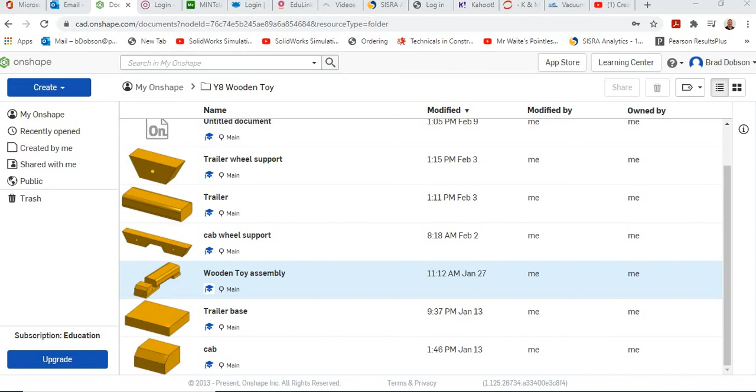Okay, in this video we're going to look at creating our cab base. So again, go to create, new document, call it cab base. It'll open up our drawing pane as usual.

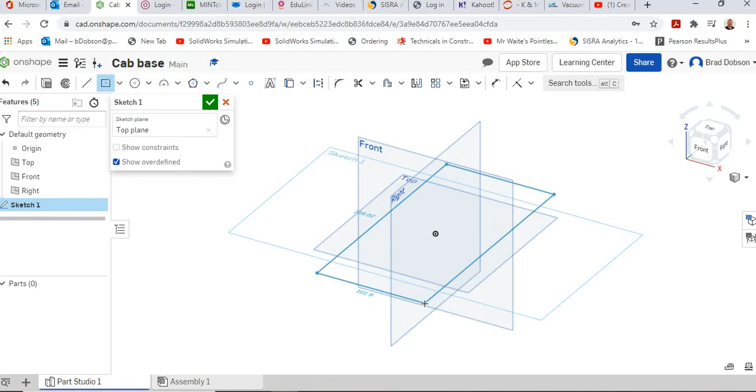Same sequence then, so we've got a sketch, we're going to select the top plane, left click, we're then going to select the center point rectangle. Hover over the origin, drag out a rectangle, again go to dimension, hover over that narrower edge, left click, drag out the dimension line, left click again and then type in 70mm.

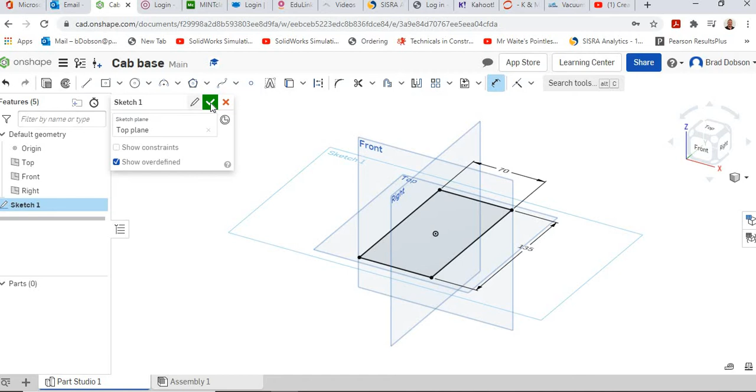We're then going to do the same, so left click, drag out, left click again, and it's 135mm, this longer edge. Once we're happy with that, we can then extrude it, so click on the little green tick, click extrude, and this time we want to select the sketch that we want to extrude, so it wants to be 15mm this time. So that's the basic shape done.

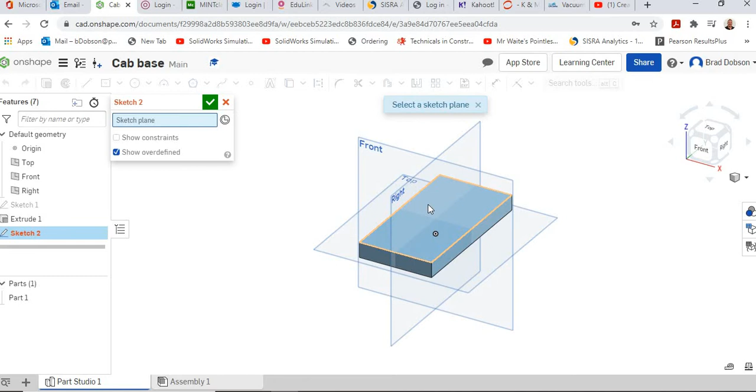Once we've done that, we're then going to position our holes on there. So again, I'm going to go to new sketch, and I'm going to select this top plane this time. And for this one, I'm actually going to convert it, so I'm going to click on this little icon here, so it's a plan view, right, looking straight down, find it a little bit easier to do the hole positioning.

So we're going to do center point circle. If yours isn't selected there, you just need to go down, but center point circle. And again, we're just going to hover over that sort of centre line there, and you can see you get this orange dotted line. And we want to come down a little bit from the top.

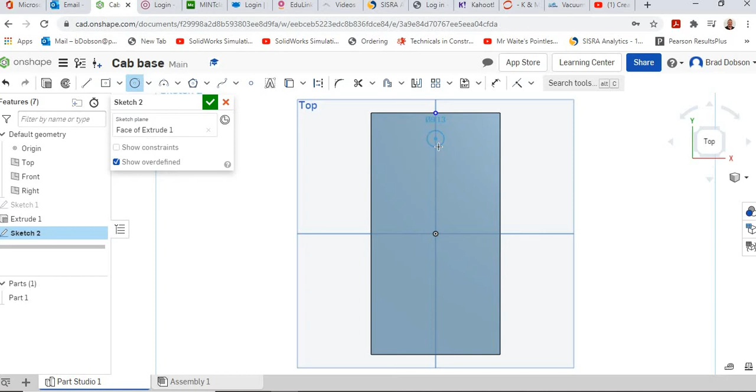Again, pull out a circle, left click, dimension that. So again, hover over the edge, left click, drag out the dimension line, type in 6mm. We then need to dimension it from this edge to the centre of the circle. So select the edge, left click, select the centre of the circle, and then drag out the dimension, and that distance wants to be 15mm.

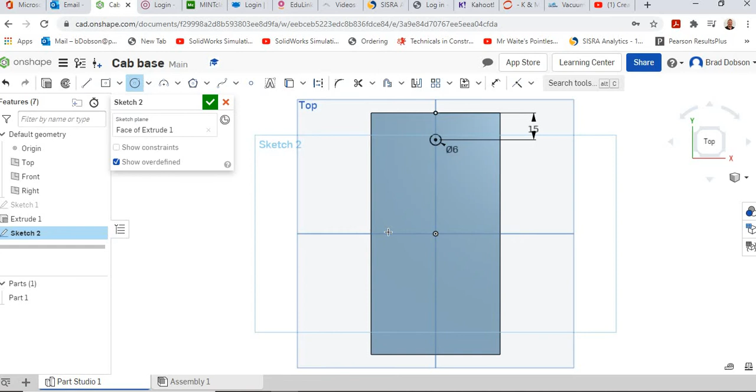We've also got a number of holes, so that's for our pivot pin. We're going to put our two exhausts on. So again, go back to center point circle. Again, try and stay away from this center line, otherwise, so we're going to go slightly above, and I'm going to draw a circle.

This time, what I'm going to do, I'm going to hover over, so I'm not clicking anything, hover over, you see the middle's highlighted orange. I'm just going to move my mouse to the right hand side, and you'll see I get this orange dotted line. It's what they call inferencing, so basically it makes this next circle always on the same height as the previous one. So again, drag out that circle, and you'll see what I mean when I come to dimension it in a second.

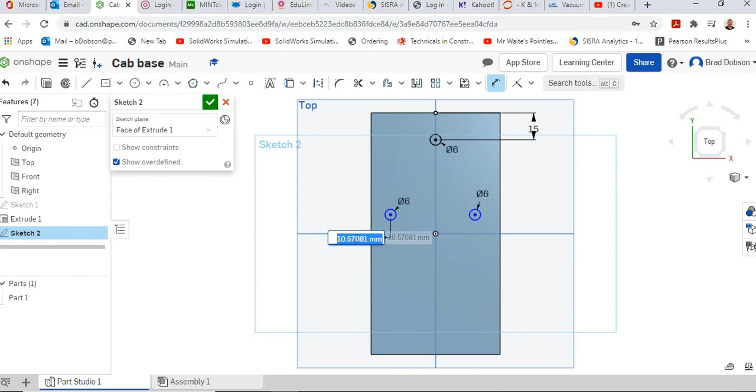So we need to dimension them again. So 6mm, again, dimension tool, select the edge, drag out, dimension. We're then going to dimension, so we need to put a dimension from this edge to the centre of the circle. So click on this edge here, click on the centre of the circle, and that distance wants to be 10mm.

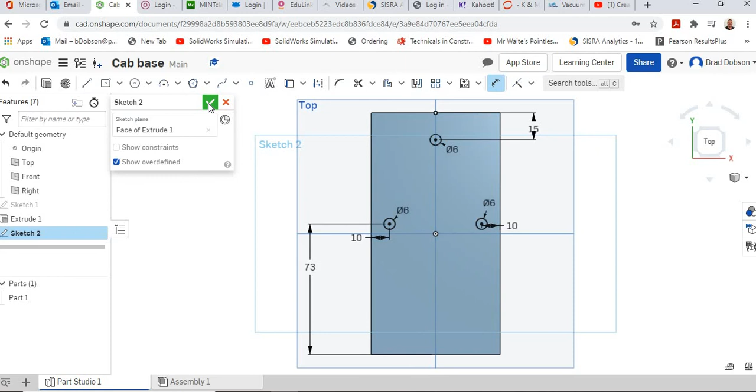Do exactly the same with the other, so select the far edge, centre of the circle, again that's going to be 10mm. And then we're going to select this bottom edge, so select that bottom line, the centre of, doesn't matter which circle you do, but the centre of the circle. What you'll notice here is when I dimension this, both the circles will move at the same time, because we use that orange dotted line, that inferencing, it'll mean that we both do it. So I'm going to change that dimension to 73, and you'll see that both of those circles move at the same time.

Once we've done that, and we've got everything dimensioned, we click on the tick box, we're happy with that. I'll just go back to a 3D view for you. And we then extrude it. This time, remember, we're going to remove material. So along the top, click on remove.

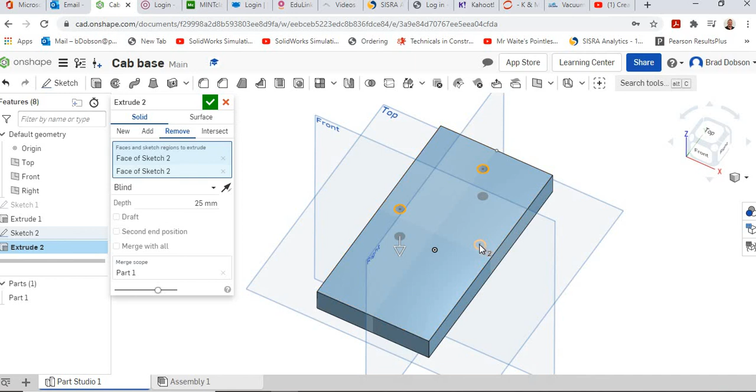And again, we need to be careful where we select here. So if I go here, you can see the outside edge is orange. I need to be right inside the circle, so only the circle selected. Again, do the same, right inside the middle of the circle. At the moment, you can see it's doing it all the way through. We don't want that, so we just want to change this measurement to 10mm, so it doesn't go all the way through the surface. So that's our cab base sort of drawn up.

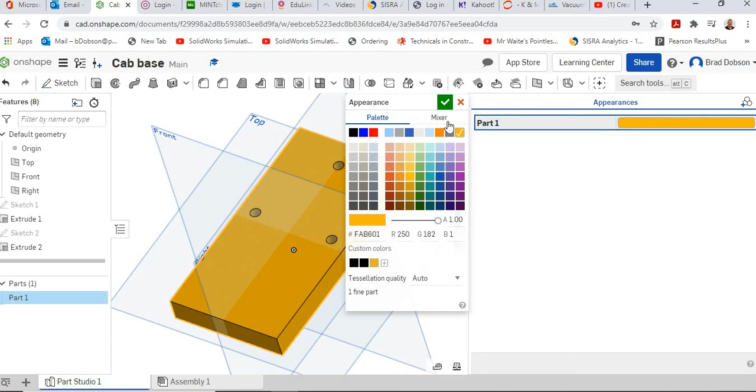We're just going to change the colour. So again, go to the three little dots, appearance panel, double click on the blue colour, and we'll just change it to our sort of standard orangey yellow for wood. Minimise that by clicking it, and then we've finished our cab base. We'll just rename that. And that's that section done.